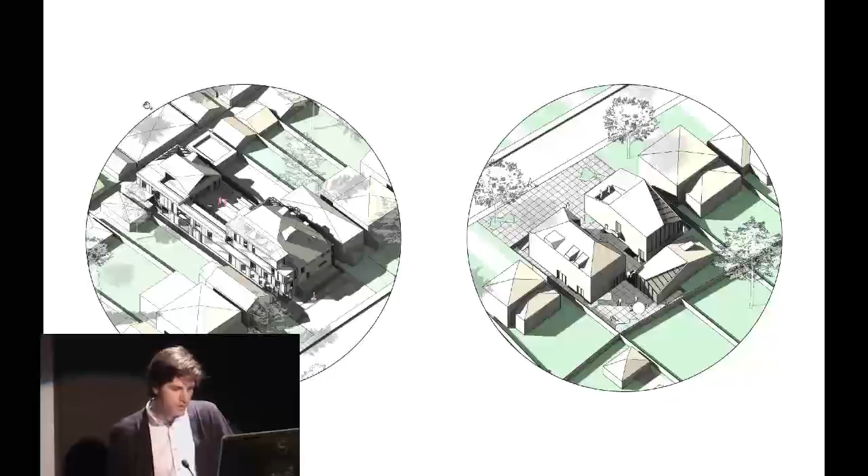And so, building from that framework, I've proposed some prototypical strategies for low-rise, high-density housing within that context of Toronto's neighborhoods. So, what we often think of as the Toronto neighborhood is really a very particular downtown fabric predicated on a structure of street, front yard, home, and laneway, and a relatively dense urban fabric of single-family homes.

But increasingly since amalgamation, a huge part of the city is the inner suburbs, Scarborough, North York, Etobicoke, and actually a geographically much larger area of the city, and often ignored in these conversations. And so within that geographic context, there's both a shortage of affordable ownership housing, but also a shortage of rental housing. Currently, the vacancy rate in rental housing is at and around 1% in Toronto, which is hugely problematic.

And that's this demand, this constant growth of the city alongside very mobile capital, low interest rates, that has really been driving so much of this condo construction, building downtown, high-rise construction. And so you see this new fabric emerging alongside the traditional neighborhoods of the downtown core and the inner suburbs.

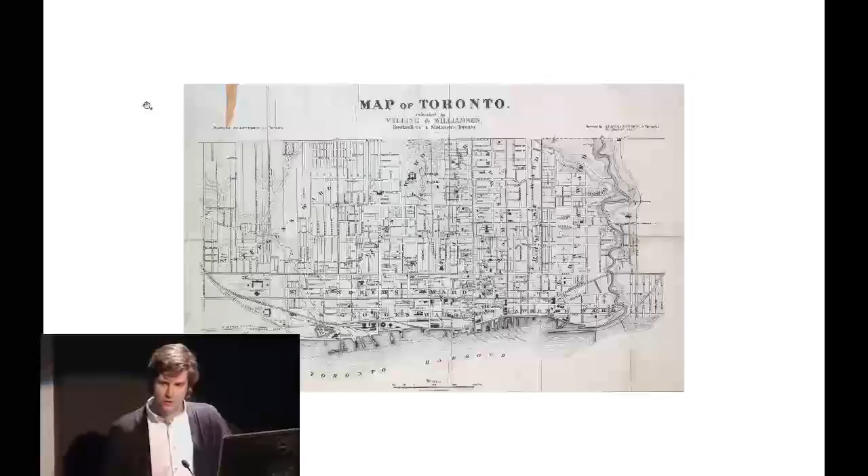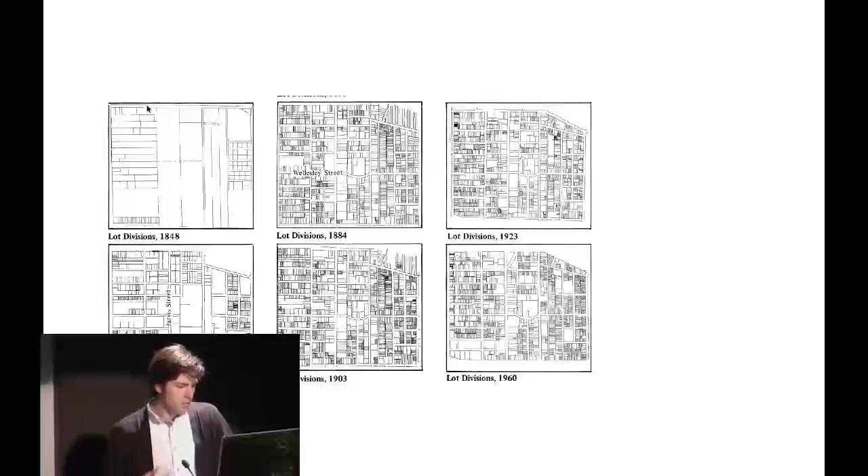And this is illustrating that progressive subdivision of land, and with each successive subdivision of land, there's more profit to be had. And so within that evolution of the city, part of the work in my thesis was getting a typological understanding of essentially the basic fabrics of the city, but also of exceptional conditions within that, insertions into those fabrics that present a different density and a different built form.

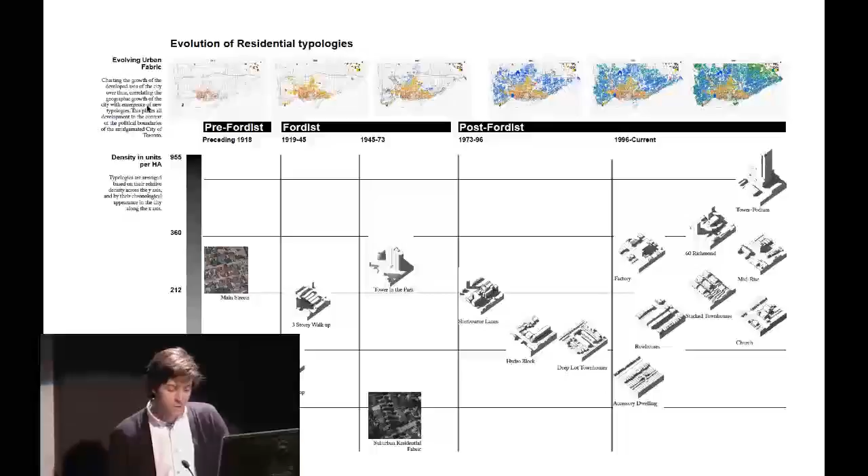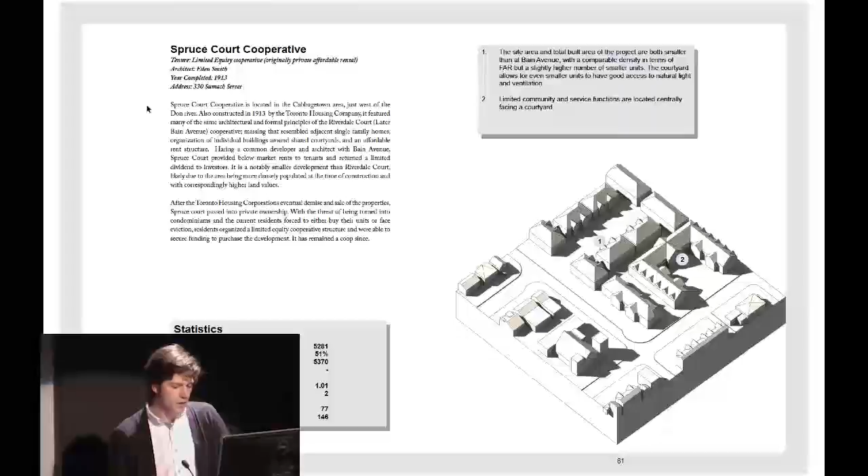And they're cataloged here alongside the evolution of the city, chronologically as well as in terms of density. So the earliest housing movements in the city were the cooperative movements of Spruce Court, which presented a significantly denser program within a built form that was very similar to the residential neighborhoods. Dormer and gable roofs, 3-story homes. And today they're maintained as cooperatives, collective ownership of the property, and remain affordable housing within the very downtown core.

And while that peripheral expansion is going on, there's also a very intensive program of urban renewal, the large-scale replacement of existing residential neighborhoods with towers, whether private developments like St. James Town, or public developments like Regent Park that is currently being renewed.

And these urban renewal programs were certainly not embraced wholesale. There was resistance by local residents, and that kind of culminated with resistance to a particular project and the election in the 1970s of David Crombie as mayor and the Reform Council.

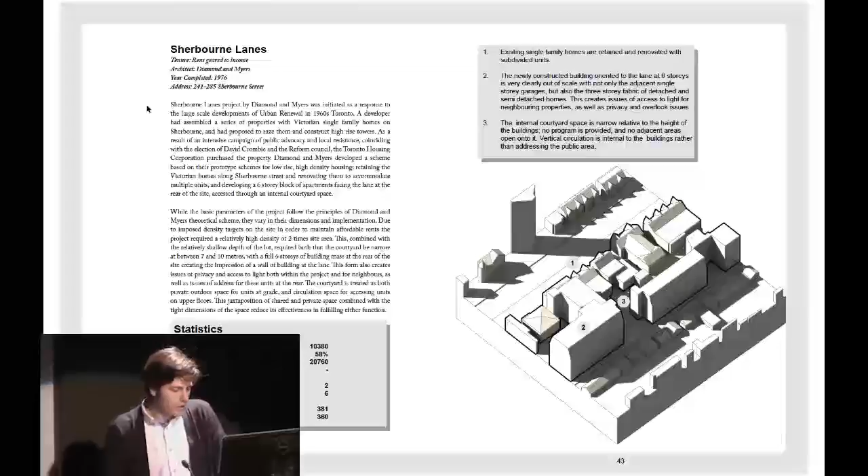It's certainly not without problems, and they themselves kind of recognize that it goes against some of the academic principles that they established for this density, but it's still a very interesting project, kind of predicated around a courtyard between existing Victorian homes and this new kind of 6-story infill.

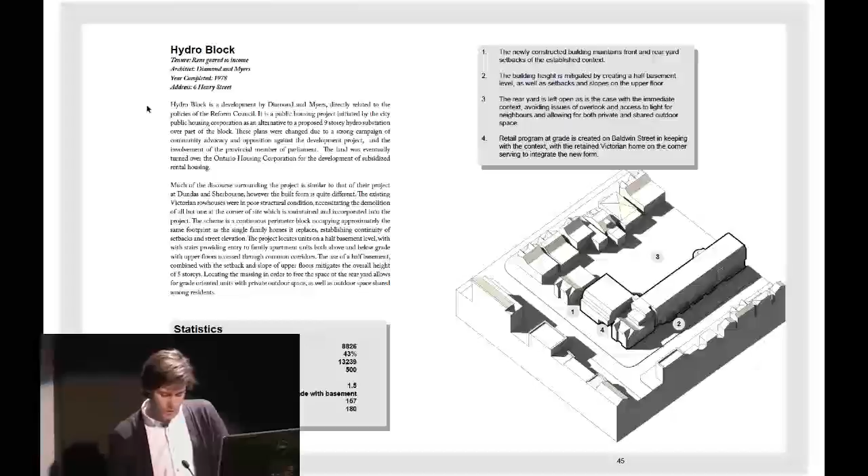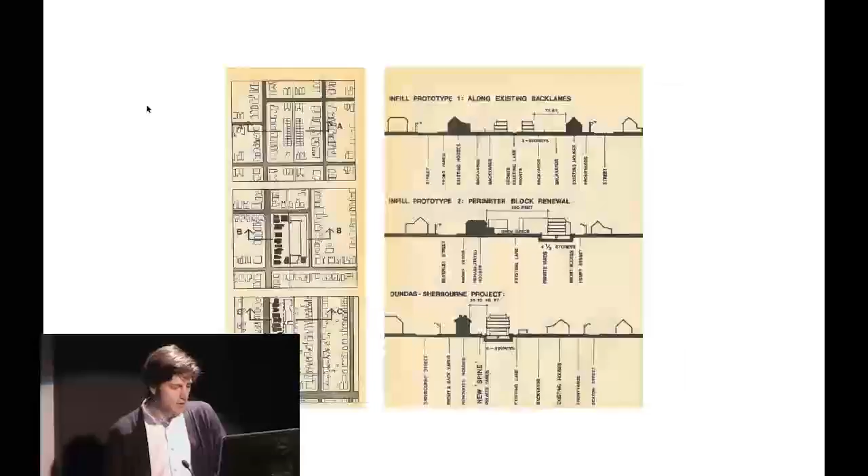In a similar vein, Hydro Block was another proposal for urban renewal that met with resistance from local residents, and ultimately this was proposed in its place, and is again kind of a 4 to 5 story infill block. So Diamond and Myers were working with this in its implementation. Barton Myers and George Baird also published Vacant Lottery, which is kind of the seminal text on this, proposing some of these principles for infill.

Some of these principles were then later applied to the St. Lawrence Neighborhood Plan, which today is a neighborhood with a very high proportion of cooperatives, so resident-owned collective housing, and remains one of the few affordable spaces within the downtown core today.

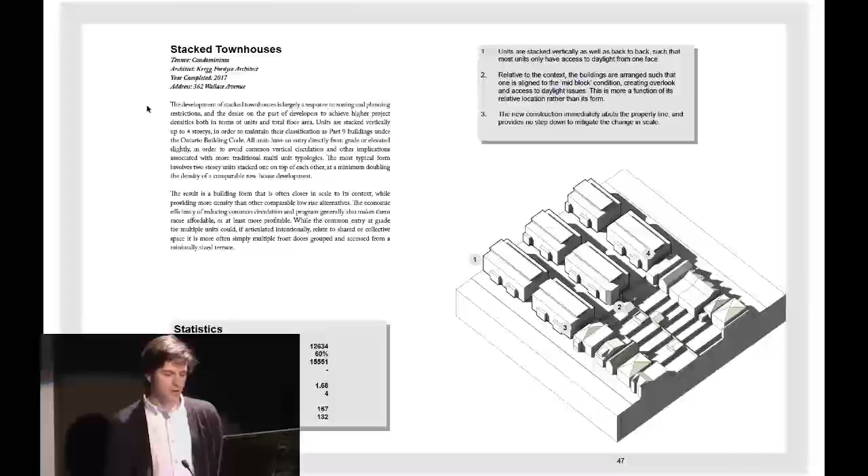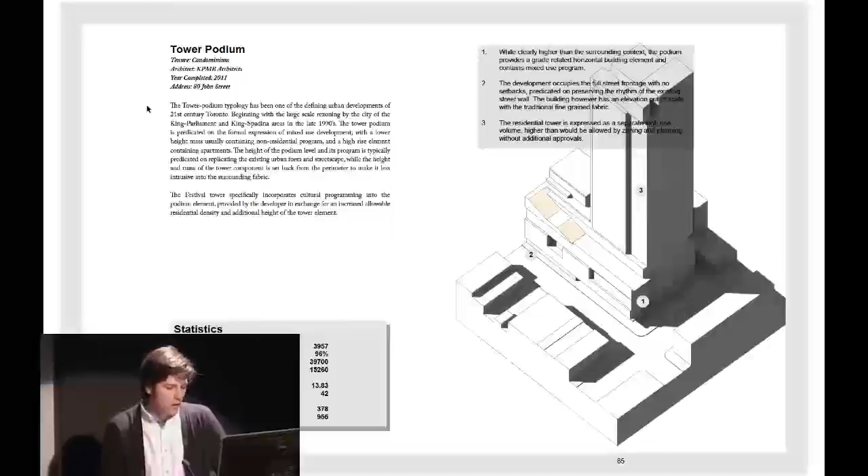And so within that framework, a basic outline of the types of intensification that are going on, at least in the downtown core: the stacked townhouse typology, mid-rise typologies along the avenues, and the tower podium that's become so pervasive in the downtown core. These are all, generally speaking, developed as condos, which is, in fact, separate from the architectural typology. It's a legal framework for development and ownership that preserves the essence of private ownership of property within a high-rise tower or other forms.

And so this kind of crisis creates an inflection point, a point where we can propose to do things differently, where there's maybe sufficient interest within the city to kind of look at new ways of building, new ways of sharing space, new ways of living together.

So this is also really a critique of the contemporary production of domestic space within those architectural and legal frameworks. The primacy of private property and private space is really problematic as we start to look at ever-increasing densities and trying to accommodate that many more people in an urbane way.

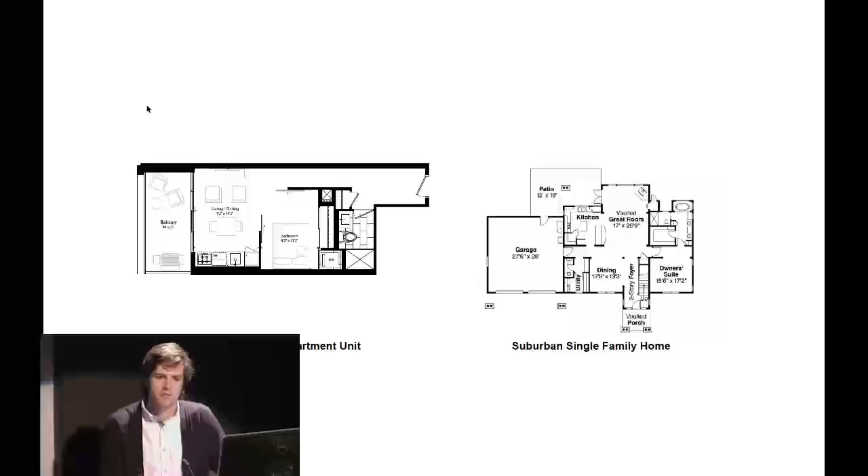And again, the similarities between the construction of the single-family home in the 18th century and the specificity of spaces within that home are taken as a factual or natural way of doing things today, but this is, we should be clear, a construction emerging largely alongside the Industrial Revolution and really the emergence of the nuclear family as the predominant social structure, replacing extended families, neighborhood support networks that existed previously.

And the emergence of the nuclear family within that framework, and the single-family home's importance in its reproduction. From there, we can begin to look for alternatives. One very interesting possibility is looking at contemporary developments in Europe, specifically in Germanic countries. Baugruppe are a form of cooperative, really.

They incorporate elements from many typologies, including co-housing, but essentially they form a legal and organizational framework for individuals to collectively pool financial resources, pool individual expertise, and initiate resident-led development. So this is an example from Berlin, Ritterstrasse 50, and it's a recognizable mid-rise typology architecturally, but the spaces that it creates allow for a much greater reflection of the needs of residents, both in the collective spaces and in the private spaces.

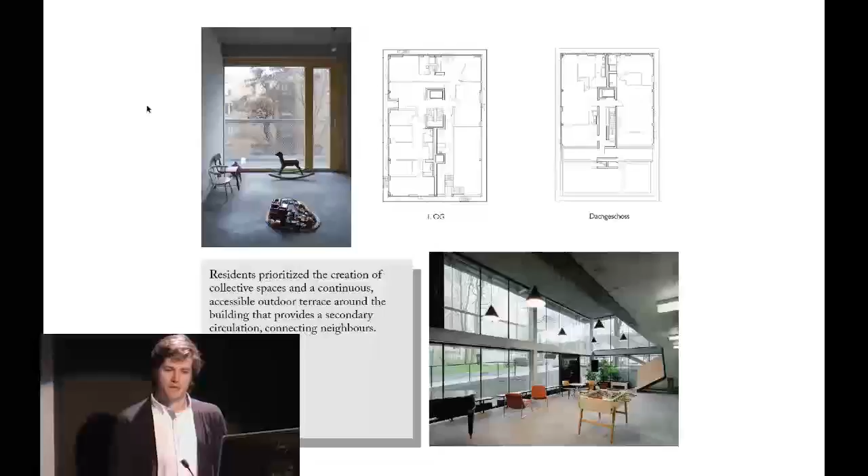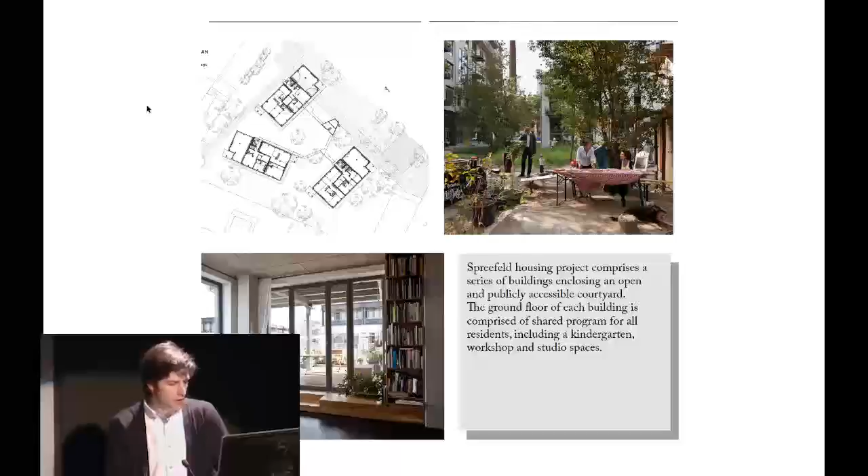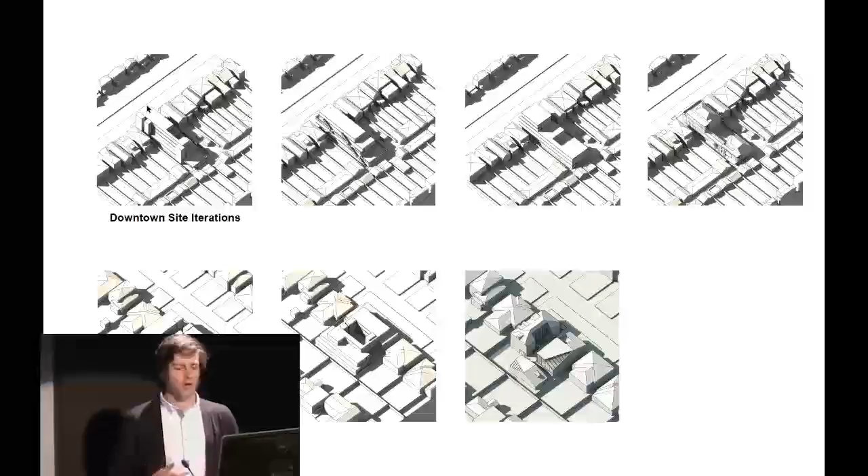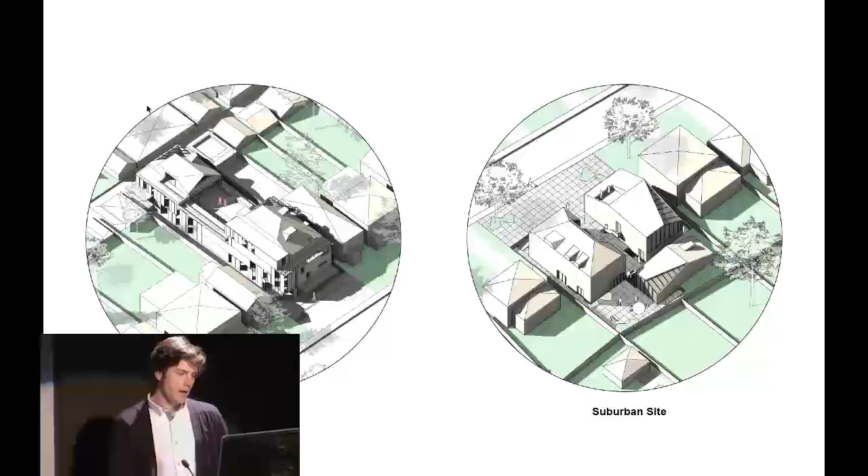So the project went through a series of iterations within those fabrics, trying to both manipulate quantitative elements, density in its various measurements, persons per hectare, floor area, as well as the more qualitative issues of access to light, privacy for neighbors, and ultimately arrived at these two proposals, each one of which addresses two single-family lots, and tries to manipulate the built form so that it has a relationship to the existing, but exists at a much higher density. Each one proposes an increase in floor area of 2 times density, and an increase in persons per hectare of up to 6 times, depending on the configuration.

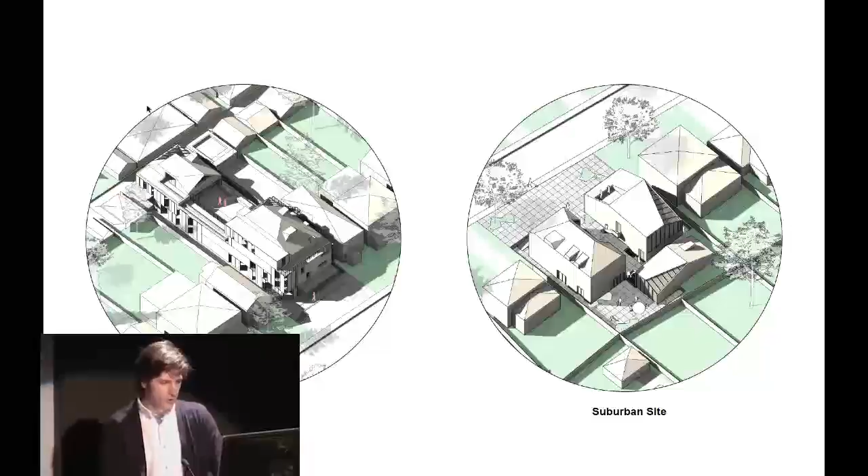And these are intended as potential projects, right? I'm not saying that these are certainly what should be built, but they're iterations of what could happen within these social and organizational frameworks if the potential for additional density in residential neighborhoods were to become practicable. And so there's an idea about the larger replicability of these and the relationship to the context

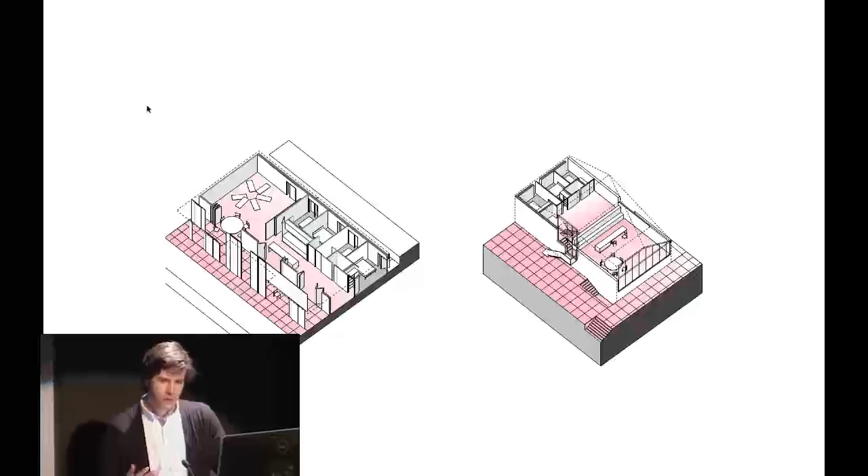within that framework, as well as a reconfiguration of the domestic space of the unit from, in the case of the single-family home, the front yard, the foyer, kitchen, dining room, bedrooms, reconfiguring those elements with a much greater proportion of shared space, as well as the traditional corridor and unit typology, reconfiguring that where the corridor acts as a shared space with a degree of permeability into the units, and incorporating shared outdoor spaces, shared programs, the traditional domestic spaces and domestic labor, the possibility for those to be collectivized.

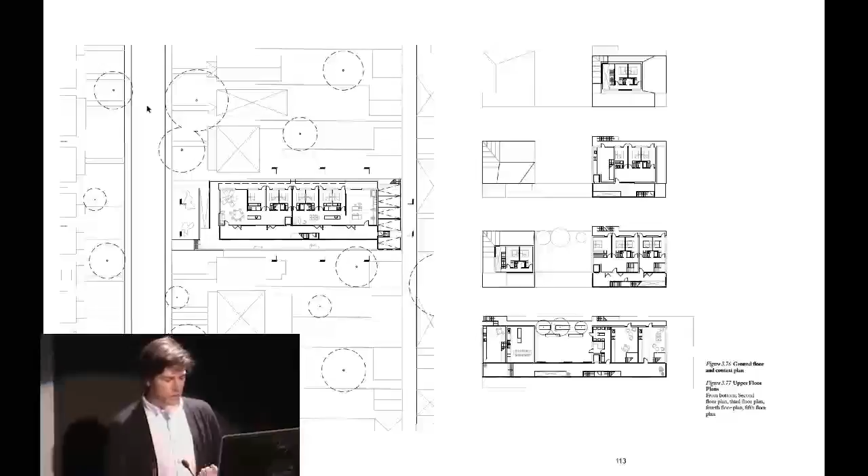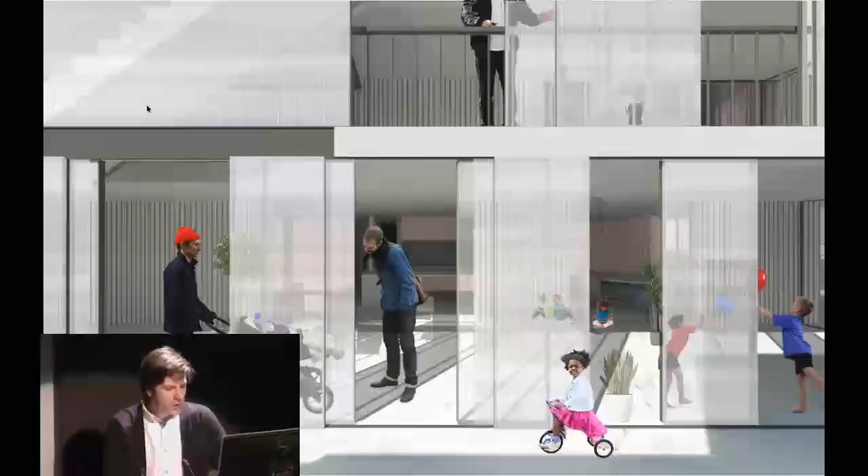So this is the downtown neighborhoods proposal, predicated on a long narrow site with a long corridor relating to units off of that. The space within those corridors could be used to spill out from the units for socializing, for children's play, for daycare. Again, just really trying to facilitate relationships between residents that are generally precluded by current architectural typologies.

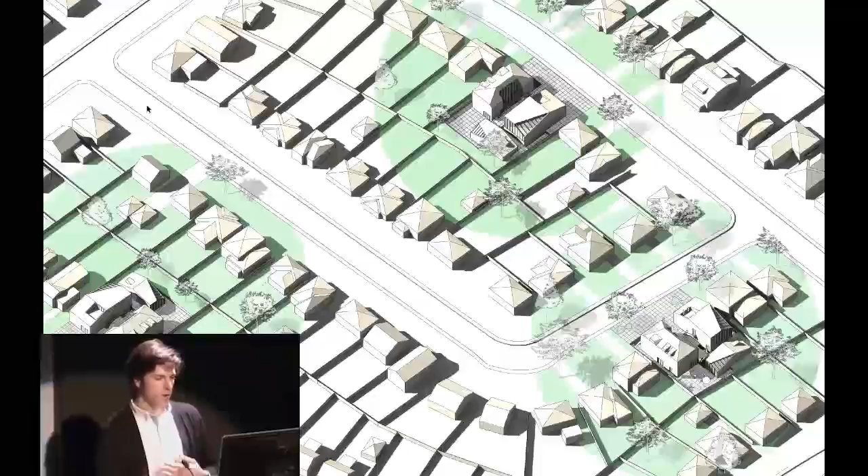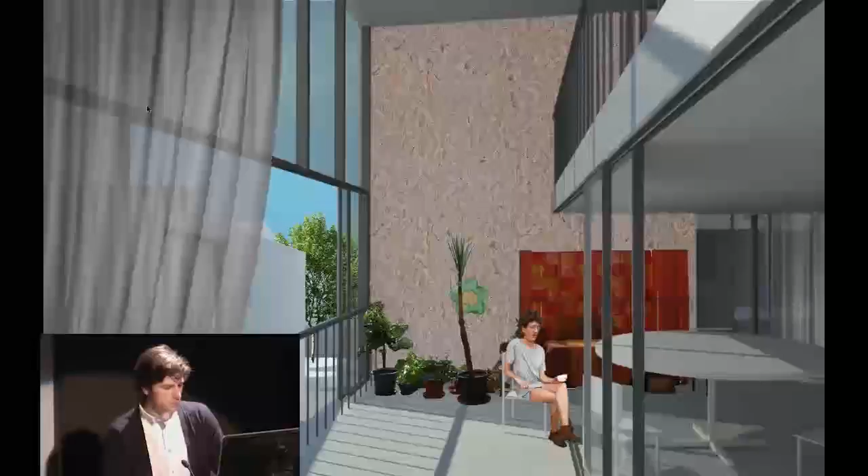And in the case of the suburban context, recognizing that rather than a consistent reading of street frontage as in the downtown neighborhoods, the fabric in the suburban neighborhoods is one of object and field. So recognizing the rhythm and scale of those single-family homes, it proposes separate buildings centered around collective space. And again, a reconfiguration of the space within the unit, within the home.